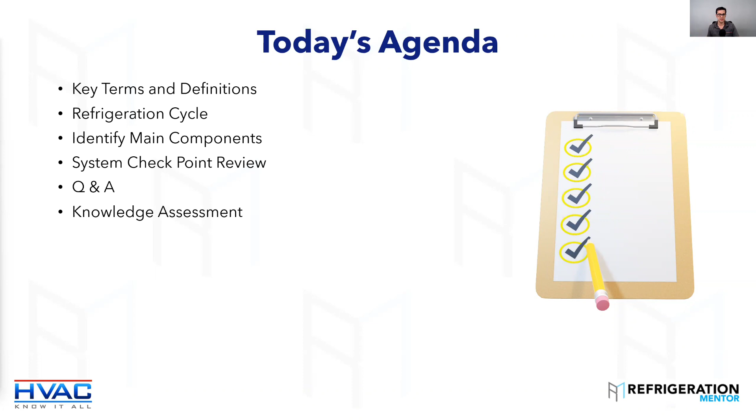We're going to go through some of the main components, and then we'll do a system checkpoint review. We're going to ask you, like, what do you guys check when you're out in the field doing service, doing troubleshooting? And we'll get into a Q&A, and I'll send you guys the knowledge assessment if you want to take a crack at it. Totally up to you.

Okay, some of the key terms. Any questions before we get started, Gary? You got any questions? Anybody have any questions? Check the chat. I'm good for now, man. I'm good. Love it. What's the chat saying? Anything in the chat yet? Nothing yet, but we're going to get that blown up. We're going to do a little chat burst. I just learned this lately, a chat burst, and we'll do one later. A lot of people are, what's a chat burst? But we'll do a chat burst.

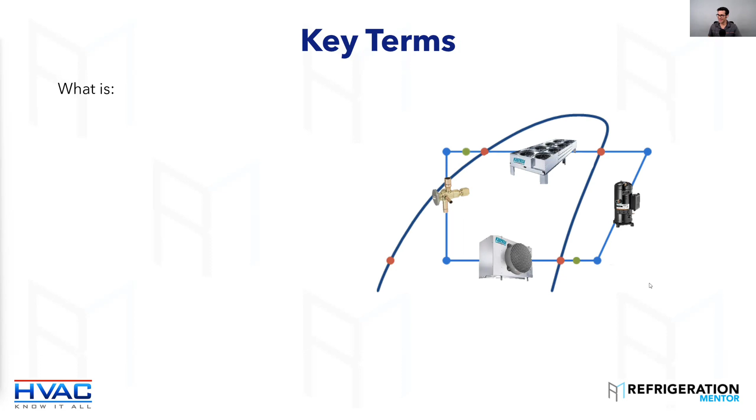So what is, okay? So this is kind of an enthalpy diagram. I call this the thumbprint. You may have seen this before in school, if you've been to school, or any refrigeration book. And so this is an enthalpy diagram here. So we got our 4 main components, which we're going to talk about again later. I'm going to ask you again. But this is plotted kind of on an enthalpy diagram.

So sensible heat. Something pretty important to know, but what's sensible heat? And I'd love to see it in the chat. You can unmute yourself if you want to have a conversation and answer it. That's totally fine here. We're open to that. But if you want to throw in the chat, what is sensible heat? Hey, and guys, if you're wrong, nobody's going to make fun of you. We're here to learn. So if you have a heat, you can measure. Put your hand up and you want to talk, go ahead. Yeah, for sure. Heat can be measured, measurable heat. Exactly. Okay, where do you find those on an enthalpy diagram?

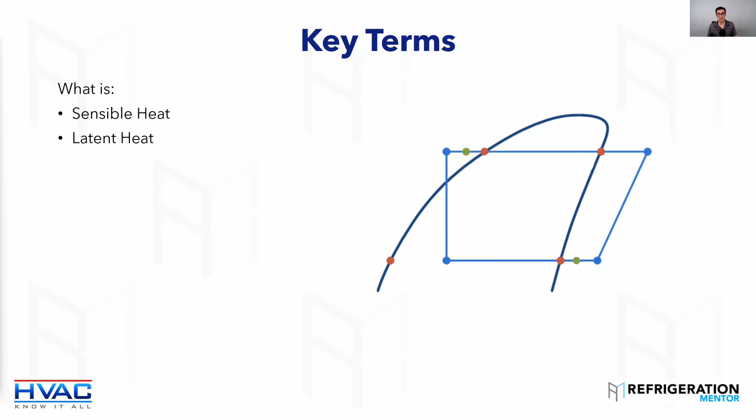So measurable heat. These are different locations, right? Different locations here, here, and here, where you can take your probe and you can measure that. That's, like you guys said, measurable heat. Anything that you can use, like a temperature probe, and measure it. Latent heat. This is something super important. And this took me, Gary, many years to understand latent heat. You know, it's been told to me over and over again, but I'll tell you, the first quite a few years before it really clicked what latent heat was.

Yeah. Anybody want to tackle this one? Anybody in the chat? Anybody want to put their hand up? Oh, I heard someone say something. Was that? Oops. Robertson, yeah. I said witchcraft. Sorry, I should have been muted. Witchcraft. Well, yeah, I used to think it was back when I didn't really understand it. Constant temperature change of state. Well, there we go. We're getting there. You know, change of state. What do you think, Gary?

Well, I mean, when we're dealing with latent heat in the summer, right? If you've got a large latent heat load, your AC is going to tackle that load before it starts to drop the temperature in the space. Let's say the space is 75, but you have a large latent heat load. So your AC is going to tackle that latent heat load, which is in the form of moisture. And when we're removing latent heat, we're removing moisture from the air.

Once it gets rid of that latent heat, then it's going to start tackling the sensible heat and then start dropping the reading you see on your thermostat. That's maybe like a simple way to describe it. Yeah, in the form of air conditioning. Yeah, no, it's like really any energy absorbed or released by a state change. So when it's changing, causes change of state, correct?

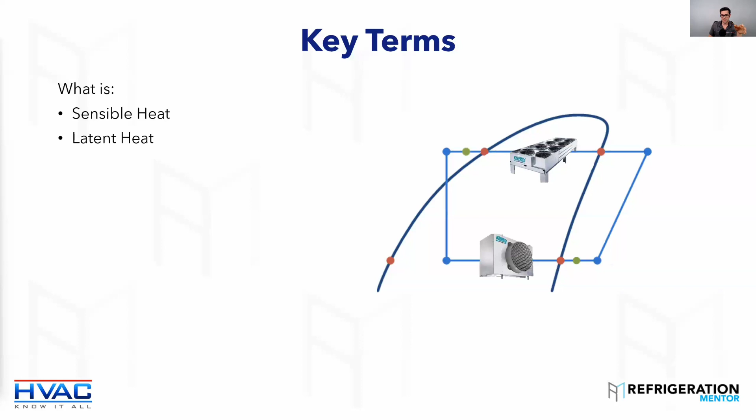So anywhere outside the thumbprint, so out here, right along all these places I showed you guys earlier, is sensible heat. Latent heat is anything inside the thumbprint, because that's where your saturated condition is. And I think I just gave an answer for the next one.

Saturation conditions. What is the saturated condition? Well, the way I like to talk about saturation is when you're looking at your gauges. If you have your gauges hooked up to a system and we have a 100-degree condensing temperature, whatever refrigerant you're using, the pressure that corresponds is your saturated state. That's what your gauges see. Your gauges see saturated state. So basically, that's the boiling point of the refrigerant.

Yeah. Anytime vapor and liquid are in the same closed space. So in that evaporator, like Brett said, condenser and evaporator, exactly. And like you said, Gary, you put your gauges on the outlet of the evaporator on that suction line and you get that pressure. Some people call that SST. Yep, saturated suction temperature, correct.

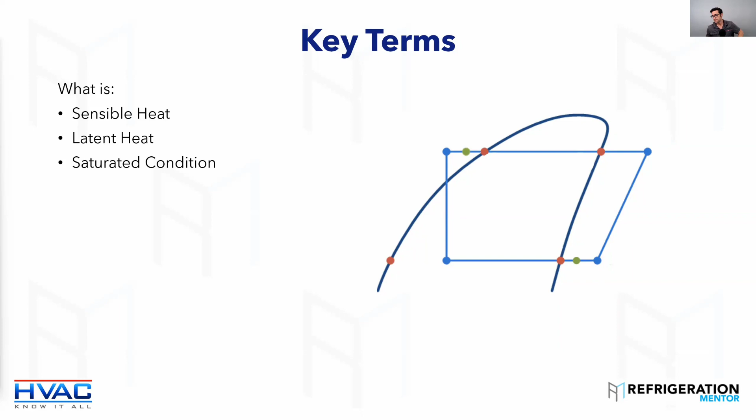Right. So the one big thing about refrigeration and HVAC is there's a lot of terms. It's kind of like the English language. You say one word and it means five different things. So it's good to understand the different terms. And saturation is anywhere inside here, right? Where you have both liquid and vapor.

Superheat. What is superheat? Superheat's super important to know too. Who wants to tackle superheat? It's outside of the top of the right curve. Sorry, what was that? I didn't hear that one. It's outside, towards 1 and 2, outside of the curve. Yep, you're correct. It is outside of the curve there. But if we're talking about superheat in a practical sense, and we didn't see this chart, what is superheat relative to saturation?

Both Brett and John said it in the chat. Your pipe temperature over your saturated suction temperature. Yeah, there you go. Exactly. So heat added above the boiling point. Remember, above it, it's vapor. Not just pipe; superheat can exist with anything. It can exist with water. So superheat is basically anything above saturation, because it can exist not just in refrigeration and air conditioning but in other realms of science as well. So just keep that in mind: anything above saturation.

Dew point. This is a good one. I like talking about dew point because it's really important to understand, especially with all these new refrigerants coming out. As a newer or experienced technician, you really need to understand these new refrigerants because there's so many of them. If you get the Danfoss app, which I highly recommend, and look at their PT charts, you scroll for like five minutes through all the different refrigerants. It's wild. Their Ref Tools PT chart is the best one in the industry, your go-to for sure. So dew point, what is it?

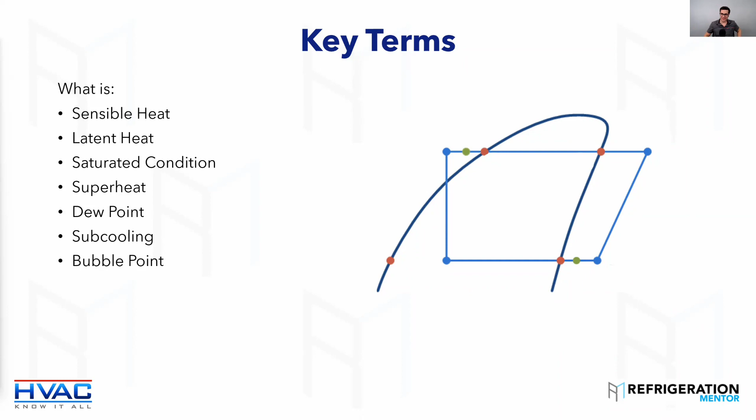Bubble point. Where's the bubble point at? So I showed you where the dew point was. Where do you think the bubble point would be on this drawing? On the right side, so over here on this side, or on this side? Maybe I gave that away pretty easy there, Gary. Well, while we're waiting, there you go.

I was just going to say that with these charts, you can actually take your system readings and plot them on the chart. Each one of these charts has its own refrigerant, from what I remember. And these are actually really good troubleshooting charts. If you're having trouble with a system, you take your readings and plot them on this chart, and you can actually see what it's doing and get a full-on visual of the entire system. 100%. I highly recommend doing that.

That's something different that most technicians don't do, and sometimes it's difficult. But with technology today, it makes it so easy. I'm going to talk in a few minutes about Coolselector 2, a free app from Danfoss that you can use. And Emerson has them and Bitzer has them as well. I'm learning new software, and I think they're really cool to get those enthalpy diagrams. We're going to show you one. But when you start plotting stuff like that, it's going to make you think a little bit differently as a technician.

Because that's how more things start to click for me when I'm actually doing more of the design and engineering side. And I highly recommend looking into some of that stuff as a technician. You should understand how to plot your pressures and temperatures on a chart like this, because it's going to open your mind up to think differently about the refrigerant and refrigeration and HVAC.

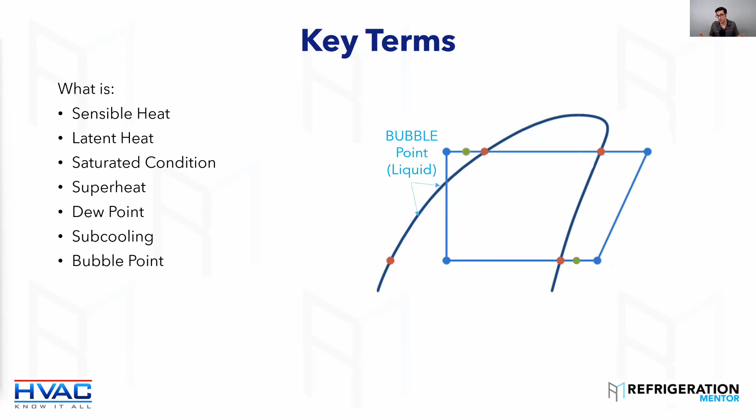Yep, 100%. And let's just say, for instance, this is a regular type subcooling right here is what you see. And every time you draw it, this is what it looks like. And then you draw it and it's way out here. You're like, whoa, something's not right here. Right. And then that's where you can get a visual of it being way out of whack. Just as an example.

So let's get to the next one. Glide. This is a good one. Yeah. Glide. What's glide? And glide is something that took me many, many years to understand. And you got to continue to look at the refrigerant in different ways. Because the refrigerants today, most of the synthetic ones that are coming out, have higher glide. When refrigerants are mixed and they have different bubble points and dew points.

Yeah. That's correct, but there's something you just missed when you said that. Does glide refer specifically to just the evaporation stage? No, glide is the... I can read you something. I don't know if I should read it now or wait till we chat about it, but glide is the refrigerant itself. It's got different components to it. And basically it's the boiling point of the least volatile across to the most volatile. And there's a gap in between the two.

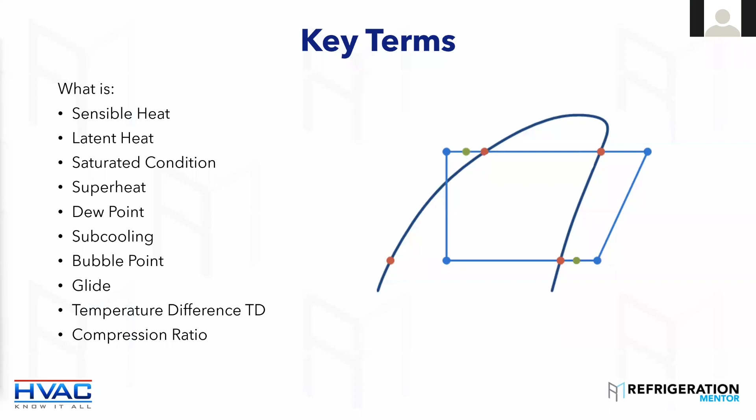Absolute suction pressure, or sorry, absolute discharge pressure divided by your absolute suction pressure. 100%. And that's so important to know, because one thing that I didn't really understand and take into consideration when I was troubleshooting systems, when I was in the field for many, many years, is compression ratio. And when I worked for a compressor manufacturer for many years, that's where it really hit me and realized that compression ratio is so important.

And most compressors fail because of issues with compression ratio. And if you don't check that, you don't really know what's going on with the compressor. You can go to any compressor manufacturer, Copeland, Bitzer, Danfoss, Tecumseh. They will tell you, you need to understand that compression ratio. Too high discharge is going to cause higher compression ratio.

When you have high compression ratio, what does that cause? That's a good question. High temps, hard work on your compressor. Yeah, heat, high temps, more work on that compressor. You're pushing it hard. Okay, here's another good one. Is it worse to have high discharge for compression ratio or a drop in suction pressure? So increase in your condensing pressure or temperature, or drop in your suction pressure or temperature?

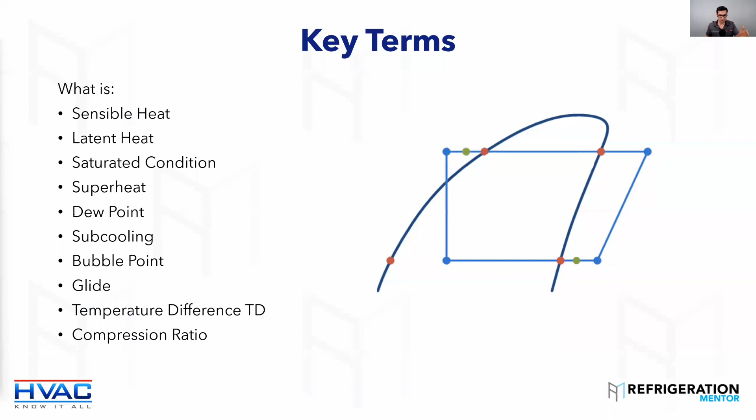Okay. When there's a temperature difference. Yeah, there you go. Excellent. Look at you guys crushing. I'm going to end that poll. Everybody got it right, so great job. Great job, everyone. Oh, and there was my polling signal.

Okay, we already went through this. What's the main components of a refrigeration system? Because there are many components, and it depends on what system we're talking about. But there's 4 main components in every refrigeration system. And when someone says, oh, I work on heat pumps, that's a refrigeration system. I'm working on an air conditioner, that's a refrigeration system. They're all refrigeration systems, only some are higher temp and lower temp.

So what are the main components? I talked about them already, so this should be easy for everyone. Compressor. Yep. Condenser, evaporator, and metering device. 100%. So these are the 4 main components. We got a compressor, we got a condenser, just like Ethan said. We got a metering device, and there's many different types of metering devices, and then we got an evaporator.

So if I was going to put a line to separate the sections, where would a line go? Because this is important to understand. Like if I'm going to separate high side and low side, where would this line go? Before the compressor and before the metering device. So something like this. You'd say high pressure, high temperature on this side, low side pressure and temperature on this side. Make sense?

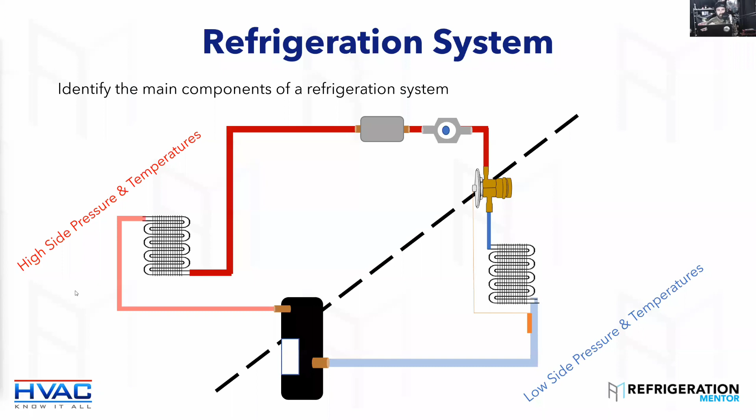I did a TikTok. I can't believe that HVAC is happening on TikTok these days, but it is. It's a growing platform. If you guys aren't on TikTok, there's a growing number of skilled trades getting on there, like there was on Instagram kind of 4 or 5 years ago.

But anyway, I did a TikTok of just explaining the filter dryer thing and checking across it, and somebody sent me a video, and the liquid line was actually frosted after the liquid line filter dryer on an air conditioning system, because it was so plugged. Like Trevor was saying, it was creating a metering device, and it was frosting on the outlet all the way up to the metering device. It was crazy. Yeah, and you can see that. I've seen it before.

So, okay, this is another enthalpy diagram. This is from the Coolselector 2 app. You download it on your computer. You can get any manual from Danfoss there, but this is the enthalpy diagram that we talked about earlier. And I want to kind of walk through how the refrigerant is going through a system. So think of this little red ball as the refrigerant. That compressor turns on, you get power to it, and it starts up. And what happens is you get something called a heat of compression.

That compressor takes that low pressure gas, starts to squish it, compresses it, this is a vapor, and discharges it out. What happens next? Right when it leaves that compressor valve, what starts to happen to the gas? Superheat. Superheats, yeah, 100%. The hottest point is right at that last squish of gas in any compressor. And after that's all superheat. So as it leaves, it's superheating. Then we hit, what point is this?

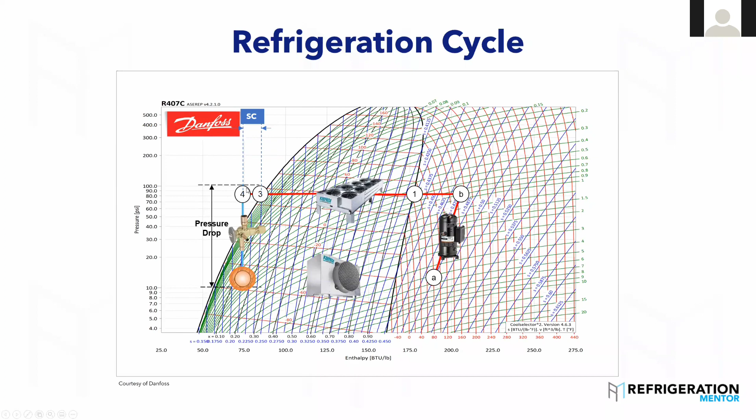Could be the drop leg, condensing line if you're in refrigeration. The drop leg, yeah, the other day I was listening to Bryan Orr, they kept saying the drop leg. So different application, people talk different. You want to understand the different terminology when you're talking to people.

So you do the pressure drop here, metering device. It could be a cap tube, a TXV, or an electronic expansion valve. We're seeing so many electronic expansion valves out there, and in the VRF or VRV world it's all electronic valves, so you're going to see more and more of that. We get back into the saturated curve, your thumbprint, back into your SST. Then that evaporator starts to absorb the heat from the product, the people, the room. And then we hit our dew point again, and bam, that's your superheat right here. 5 to A.

Yes, you're right, Brett. That drop leg, condensate leg, goes back to the receiver. Also known as a condensate line. And a lot of people don't know this. I said this a few years ago and people laughed at me online, but that condensate line, or drip leg, is the only place where refrigerant will flow in both directions in a system.

Because out of that condenser, you have liquid dropping down into the receiver, and then you have vapor moving up from the top of the receiver back into the condenser. Just like if you pour out a bottle of water, the water's leaving, but there's air going back in, which is actually forcing the water out. A lot of people don't know that. It's really interesting. I think there's a DuPont refrigerant piping book.

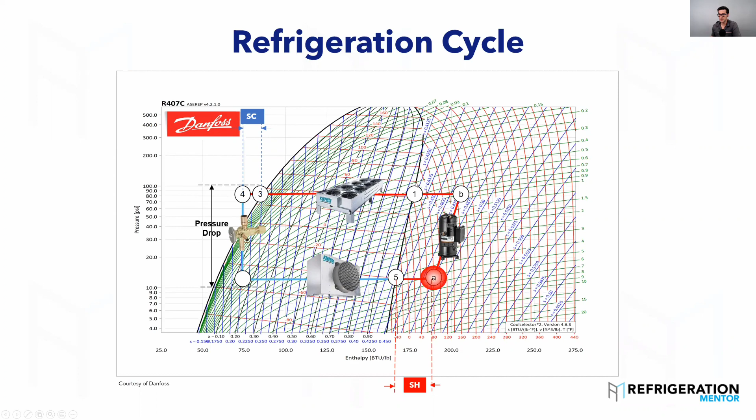So that's how the enthalpy diagram works. You see a lot of these red and green lines. They all mean something. Engineers use that all the time, but the main ones you're going to use are like this red line. And notice this is 407C. Do you see how this red line I have is straight, but the 407C line is on an angle? So here's your bubble point temperature, here's your dew point temperature. They're different. So it's good to know that stuff.

Okay. We've got a system checkpoint review because we're going through time real quick here. In the chat box, put the points you would check. I'll give you a couple quick ones: suction pressure, suction temperature. So throw some in the chat box. When you're out on a service call, setting up the system, doing an install, doing a commissioning, what are some of the checkpoints you're going to do?

Yeah, discharge temperature and pressure. High side pressure and temperature after the condenser for subcooling. Retrofit from R22 to MO99, adjust the TXV for higher superheat. Well, you want to check with the compressor manufacturer, especially if it's in warranty. MO99 is not always approved for certain compressors, so it's always good to follow that up. I've seen it many times where the equipment manufacturer says a certain refrigerant is approved, but it's not approved by the compressor manufacturer. Doesn't mean it's not going to work, but it doesn't mean it's going to work very long either.

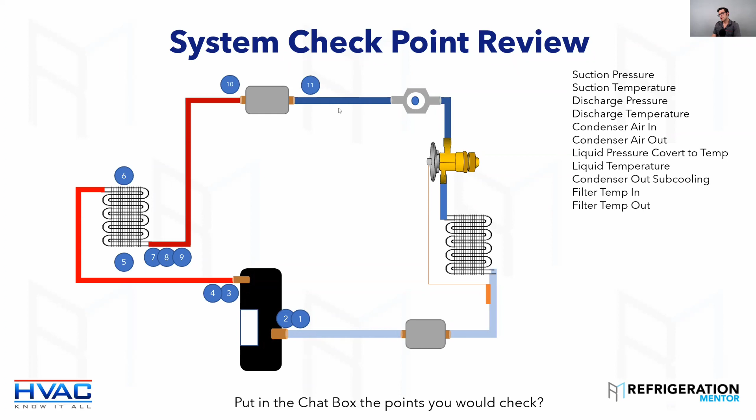Okay. Sight glass, if it has one, you want to check if there's moisture in that system. If the system's not installed properly from day one, you're going to run into lots of issues. Day one installation is the most important for a system. When I worked for the compressor manufacturer, I saw compressors failing after a year or two because of that day one install. You can tell that by looking inside a compressor. Sight glasses are a friend of the technician because it's the only window. Well, not the only window, because you've got oil sight glasses and stuff like that.

But it's a window into the system. And a lot of people say you don't need a sight glass, but I find sight glasses are very, very useful, especially if you know what that sight glass is supposed to be doing at certain times, because a sight glass isn't always clear, even during normal operation. There's times where a hot gas bypass valve could be open, and when it's feeding hot gas from the discharge into the evaporator, sometimes your sight glass starts to flash, but that's normal.

So you really got to understand what you're seeing and what you're looking at. And when you know what it's supposed to be doing in certain situations, if it's acting differently, then you know there's something wrong with the system. So I love sight glasses for that reason. Oh yeah, for sure. And they tell you so many different things.

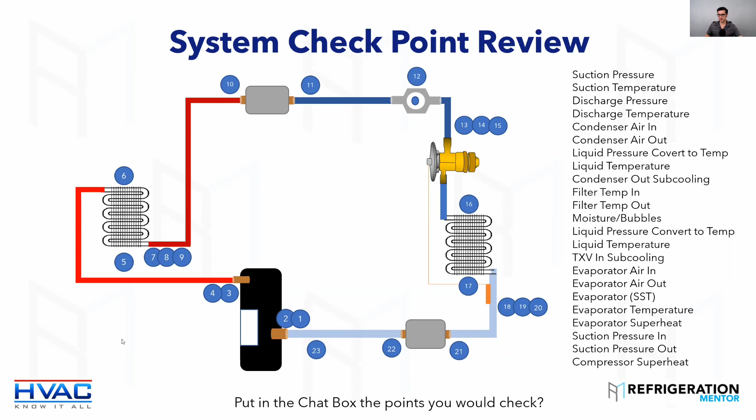So mobile apps. It's so important to have apps today on your phone, having the knowledge, having it in your hand to really help you service and troubleshoot systems. So I know Gary has an app, HVAC Know-It-All. Great app, great community there. If you're not already on it, check it out. You need these other apps as well.

Emerson AE bulletins. So these are the manuals for all the Emerson products, like Copeland and their demand cooling and their CoreSense. If you work on any Copeland stuff, you need to have that app. You're going to learn why I feel like I'm so good. And I know I'm good at refrigeration now because I read hundreds of these documents over and over again, and then go and apply it in the field.

The Bitzer B-Spot app, another great app if you're working on Bitzer compressors. It has all their documentation in there. And same thing, like yes, Copeland sells semi-hermetics, Bitzer sells semi-hermetics. Semi-hermetics pump the same way, they work the same way, but there is a lot of uniqueness between them. I'll give you one quick example.

Copeland on semi-hermetics says they don't like to see the discharge line temperature, 6 inches from the discharge, higher than what temperature? Anybody know? Throw it in the chat. Unmute yourself. 225, 100%. Copeland doesn't want to see over 225. When you look at Bitzer, what does Bitzer say? 6 inches down. Don't know that one? Yeah, that's okay. It's 250. So there's different temperatures.

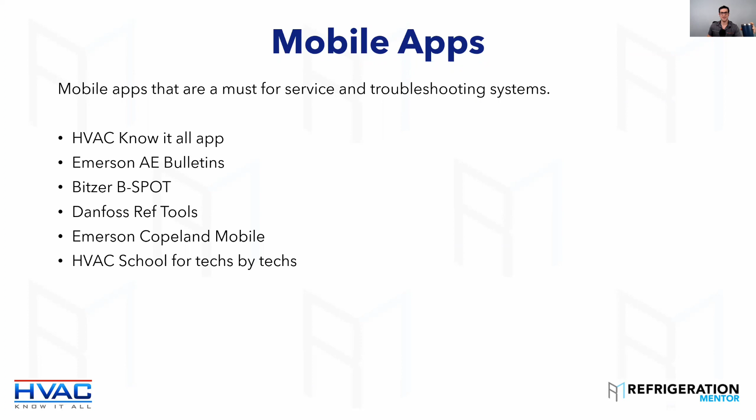You should be charging more. Maybe one day. Maybe one day. You should be charging more, but that's the best $10 a year you're ever going to spend. Yeah, I would be charging more if I were you.